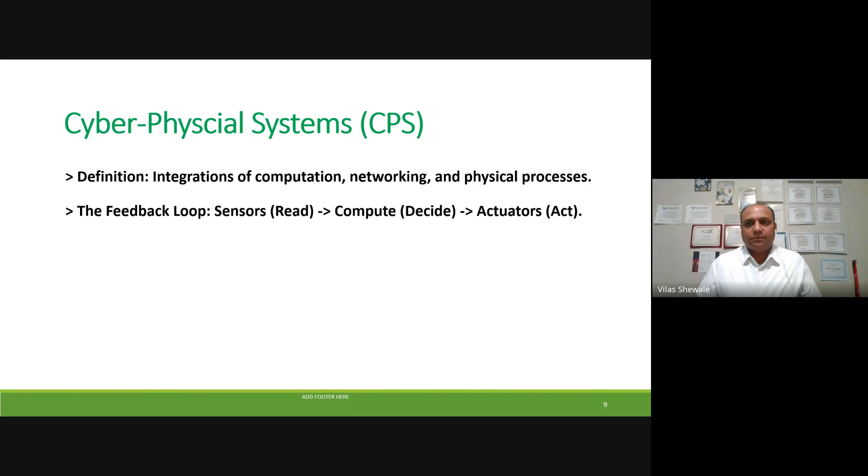In IT, the worst case scenario is usually financial loss or privacy loss. One of the prime examples is the breach of Aadhaar, which I explained last year - one of the biggest breaches for the public sector, where addresses, names, phone numbers, and everything were stolen by hackers.

But in a cyber physical system, the worst case scenario is physical destruction or even loss of life in some cases. Critical concerns.

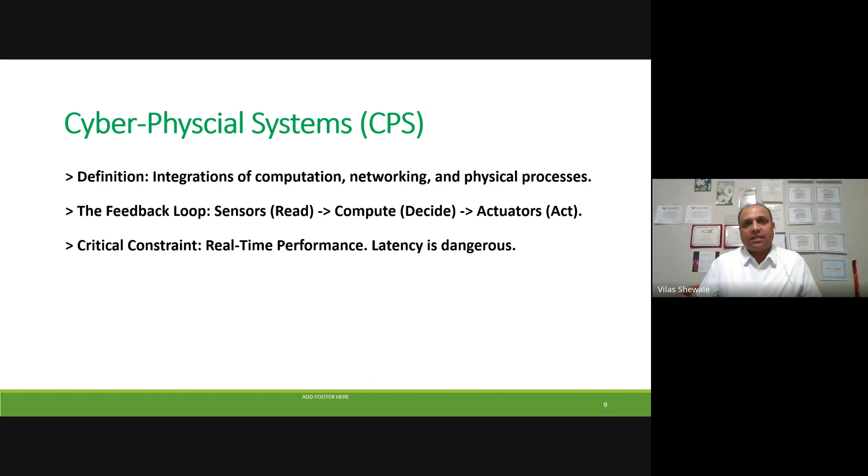If a hacker takes over a Tesla - a car itself is a cyber physical system - and disables the brake, what will happen? Think about this as a kinetic weapon. It can be used as a weapon, meaning you can intentionally cause brake failure in front of someone, or accelerate the Tesla in front of someone, to cause harm.

If a hacker takes over the dam floodgates - imagine this, I have a very interesting video coming in a few slides - that is a weapon of mass destruction, causing havoc in that region to gain financial benefit or some other motive. You don't know if they're using it to terrorize the region - some foreign actors doing this.

So securing the system matters, because the blue screen of death, the famous Microsoft blue screen of death, could mean actual death. It's pretty scary, but it's the reality. There's no movie fiction anymore, it's just the fact.

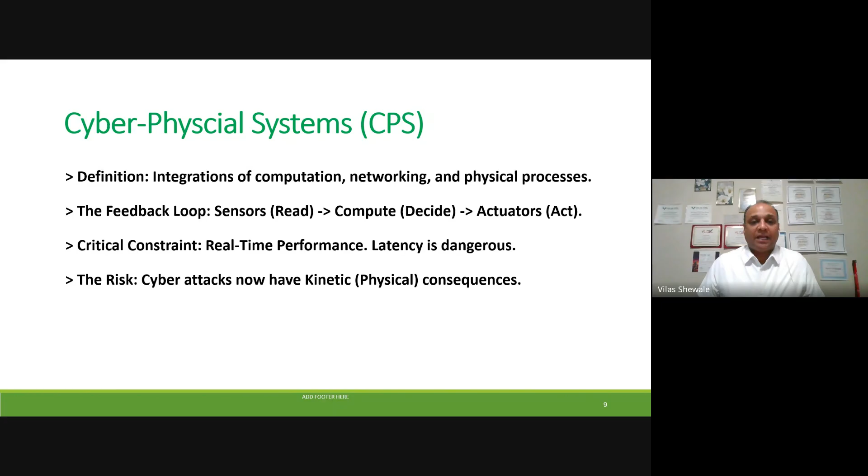So what does the smart grid architecture look like? That's pretty simple in my viewpoint. So visualizing the target - the grid is no longer a tree, meaning roots and branches and everything. It's a web, it's a mesh. The prosumer, you're a node.

Pro-consumer and prosumer - your solar panels inject the power, your EV absorbs the power. This is basically bidirectional flow, which is a nightmare for stability. So it requires constant millisecond level communication, has to be always on, all the time.

The advanced metering infrastructure is the chat network of the grid. If I can hack the advanced metering infrastructure, I can tell 1 million meters to disconnect simultaneously. What is that? Basically the whole city goes dark.

And there is a SCADA system. The SCADA system is not just related to the power grid or anything - we use it in oil and gas, and we call it OT infrastructure, SCADA system. Whatever applies over here applies in my field as well, but I'm just giving you the entire aspect through the renewable energy point of view.

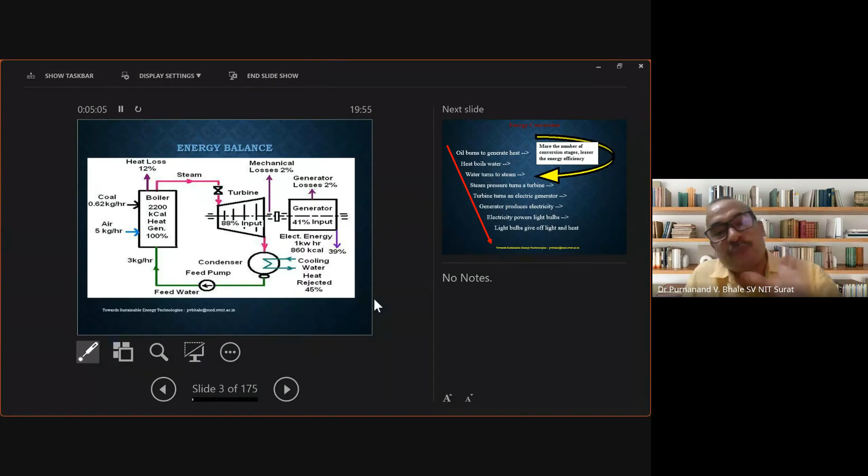So that needs to be revisited. It's nothing like preaching, but I remember when I was a student, our thermodynamics teacher emphasized this, and I'm trying to follow it to the extent possible.

So the more conversion loops involved, the more will be the losses, obviously. We need to see that direct energy conversion systems are equally important. In fact, solar came more as a direct energy conversion system, but later on, unfortunately, it got hooked to the grid. As far as thermodynamics or energy conservation is concerned, thermodynamics can be said to be a prelude to energy conservation.

So we all know about the first law of thermodynamics: energy can neither be created nor destroyed, right? But it can be wasted. We need to save energy. That's important, and that is what the emphasis of the Bureau of Energy Efficiency is also.

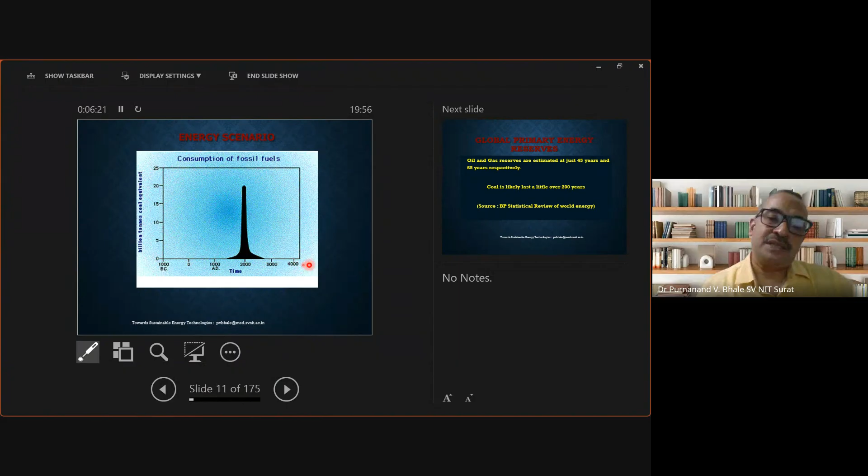As far as fossil fuels are concerned, we are on the verge here. We came across the tremendous possibility of changing our lifestyle through fossil fuels, but most of it we have consumed. There are many different agencies that talk about the availability of resources. Their estimates are slightly different, but within 10% they are correct. People are saying that oil and gas reserves are for 45 to 65 years, and coal is likely to last for 235 years.

In that context, although we are an independent country, are we energy independent? A lot of research is happening, a lot of installation of solar is also happening, but to what extent is it sustainable? Even the government is doing a lot of good things, but in that context, we need to see how we can develop sustainable technologies.

So if you consider the amount of energy we receive every day from the sun, it is tremendous compared 1:1 with such energy requirements. It is said that if we can tap just 5% of solar energy, it will be 50 times more than the world's demand. 5% tapping of energy means you need 5% of the surface area covered with solar systems. It's a huge target.

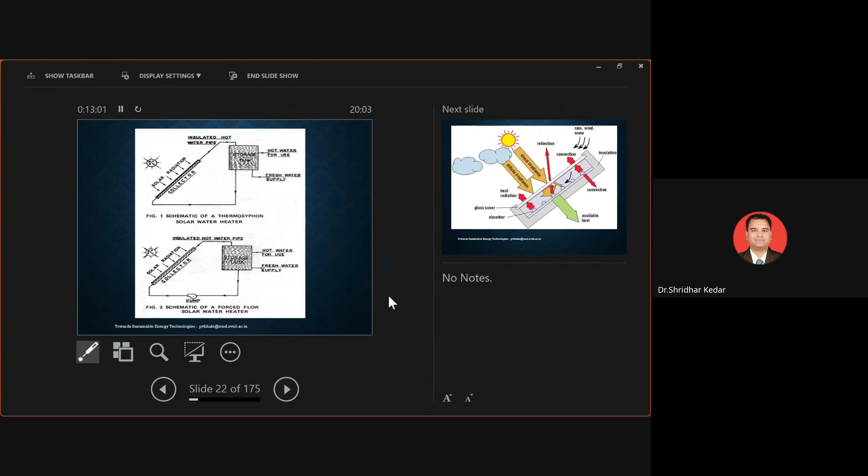Another problem is the tubing - salt deposition inside the tubing. And if you want to, can you find out the difference between these two figures? Any difference? At the bottom. One is natural circulation, and another one is forced flow.

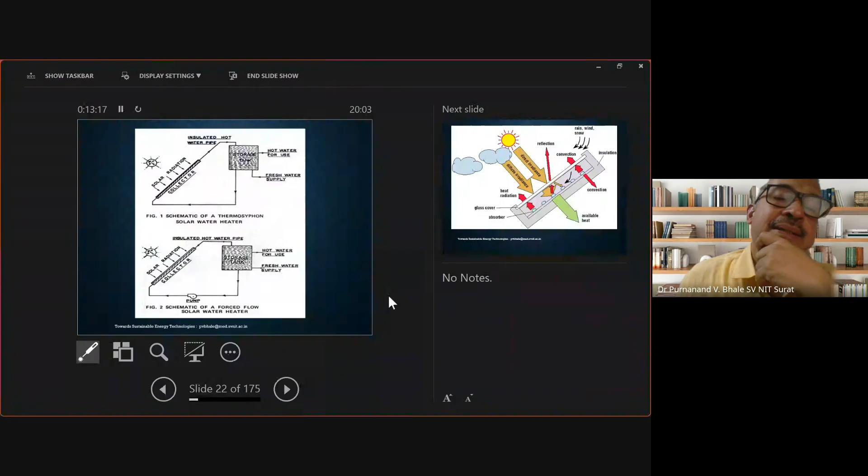Yes, correct, correct. So industry may have the requirement when it is a large size requirement, maybe some 1 lakh liters per day, and industry may need to use the pump. Otherwise, for domestic applications, residential applications, resorts or hotels, during the daytime it can store, and during morning or late evening you can extract. So one is having natural circulation, another is having a pump.

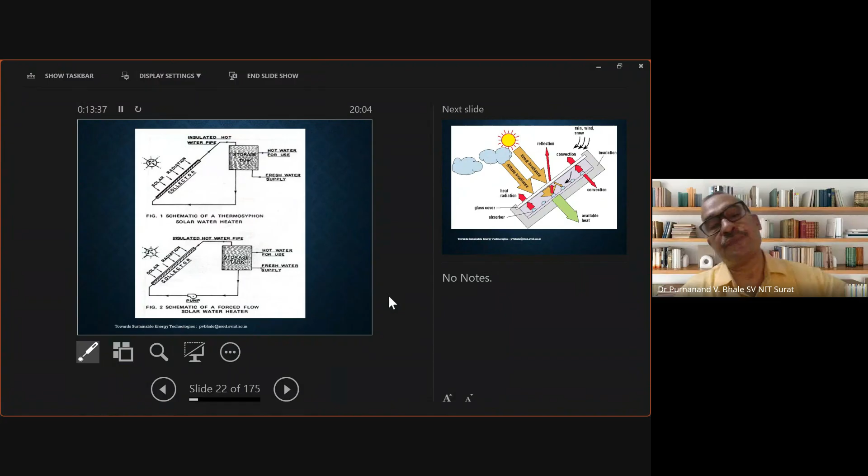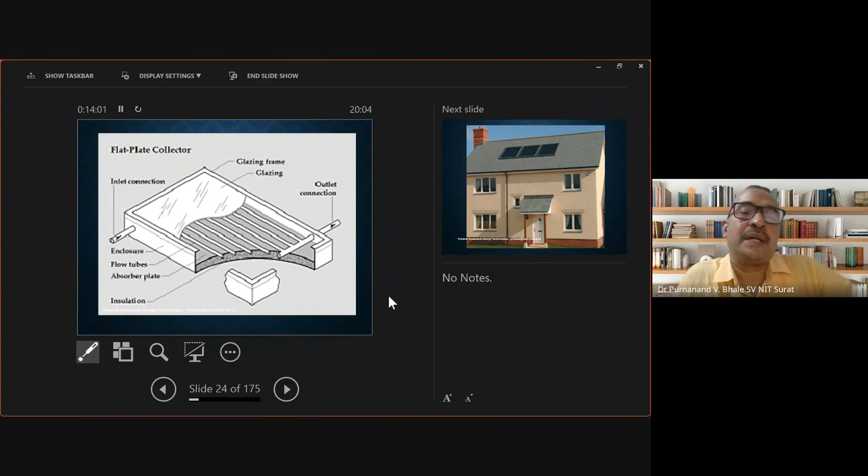Normally, everyone knows about the losses which take place, how solar energy gets trapped and how it gets converted for useful heat - there are losses. Earlier this used to be the system, now it has totally changed. Even in the tubings, because if a single glass breaks, the cost is high. Similarly, the deposit of dust is also challenging. If you have this type of surface, the dust deposit is minimal. We have some articles on the effect of dust deposition also.

Similarly, this is again some solar thermal system, a solar cooker, which is used for cooking. But the challenge is how we can make it more popular - it's still not so popular. Can you mention some of the reasons why it's not so popular?

Sir, a solar tracking system is not available. Okay, it's a flat plate. And again, the total energy which we are getting from that is not concentrated. We are lagging in getting the energy. Moreover...

Due to the hard water use problem, in case of ETC tubes, there is scaling and corrosion problem inside the evacuated tube collector - small water droplets, white deposits. But as far as solar cooker is concerned, what are the limitations of the solar cooker? Why is it not getting popular?

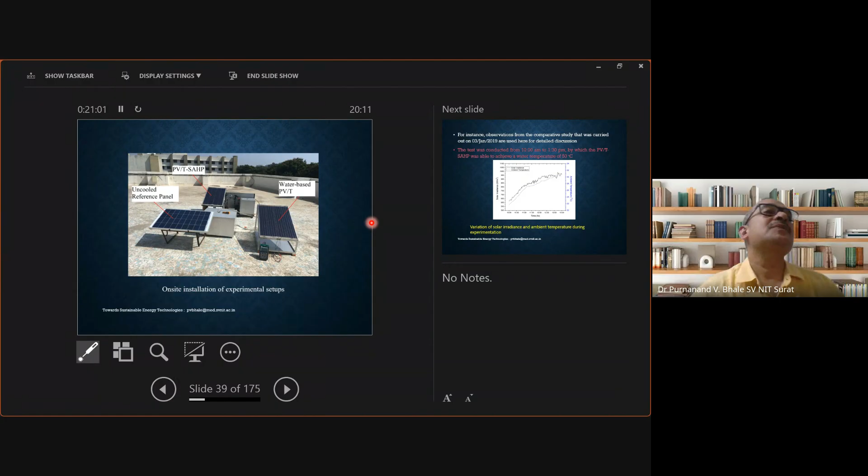So in terms of thermal management, we explored certain possibilities and developed certain systems. For solar radiation, we have a weather station and are continuously monitoring. You can see the PV temperature can go up to 65, 70, 75, and sometimes even 80 during summer. But if you can maintain it with certain ways, it's possible to maintain the PV efficiency, which will also increase.

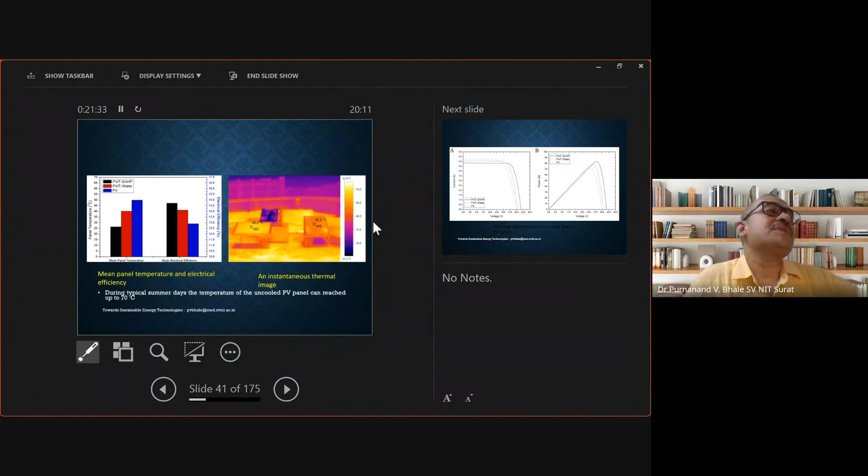We developed certain PVT systems with one industry involved in hot water solutions for hotels and resorts. We had an MOU, and now at many places this is at TRL level 8 to 9, because at certain hotels and resorts this has been under installation with different capacities. You can see that if you need an electric geyser to heat a certain quantity, the system we developed is PVT based, coupled with the heat pump system, which can achieve reduction. It is air source as well as water source systems, showing tremendous reduction as far as hot water is concerned.

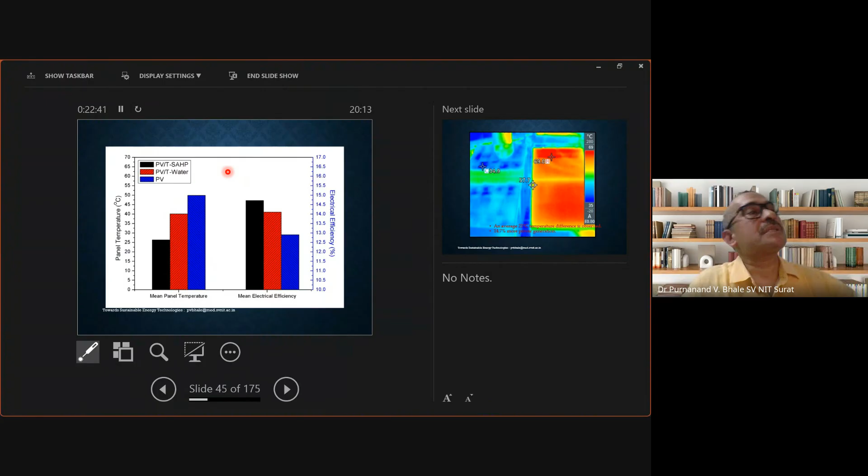Hot water industry is a huge industry as far as the requirement is concerned for various applications, not just for bathing purposes. You can see significant improvement in efficiency, and it's not just efficiency improvement, but getting hot water also. The PV has a very high temperature, but if you can maintain it, it's possible to have higher power generation also. Similarly, if you have independent PV and thermal systems, the space requirement is very high. On the other hand, if you have this technology, the space requirement is very, very less on the terrace.

My point is, why is solar thermal power not happening today? This is my question. Efficiency here can be higher. You convert solar energy into steam, and you can make steam rise just like a power plant. Why has PV progressed to such an extent that almost nowhere will you find solar thermal or concentrating systems being used for power generation, though it is used for process heating? Can anyone tell the basic reason why electrical energy generation is not happening with the solar thermal concentrating system? I want to know.

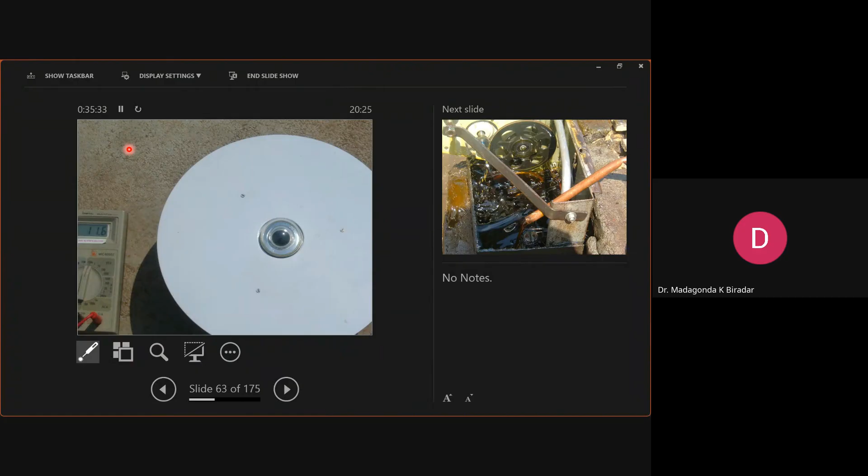And all type of jugaad we made in those days. This is a pump you need, otherwise a very costly pump to circulate the hot fluid.

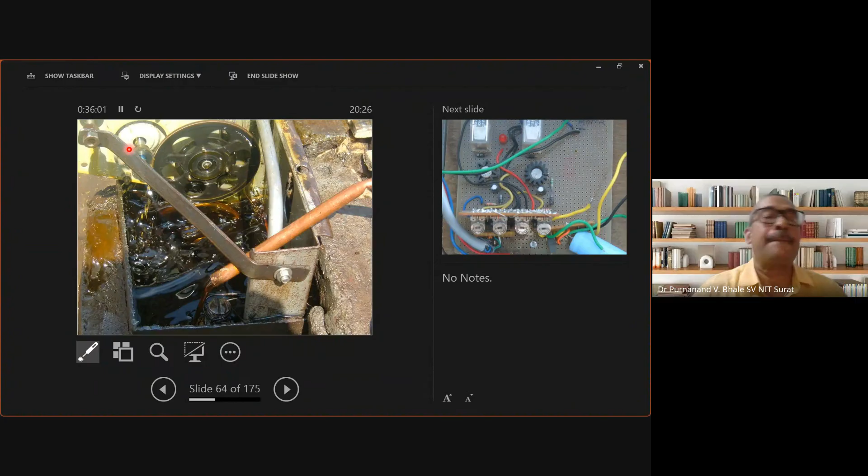So this tracking circuit, and you can see here, can you see that it has not come properly? This is a wiper motor of an auto rickshaw, which we also used in this system in this way.

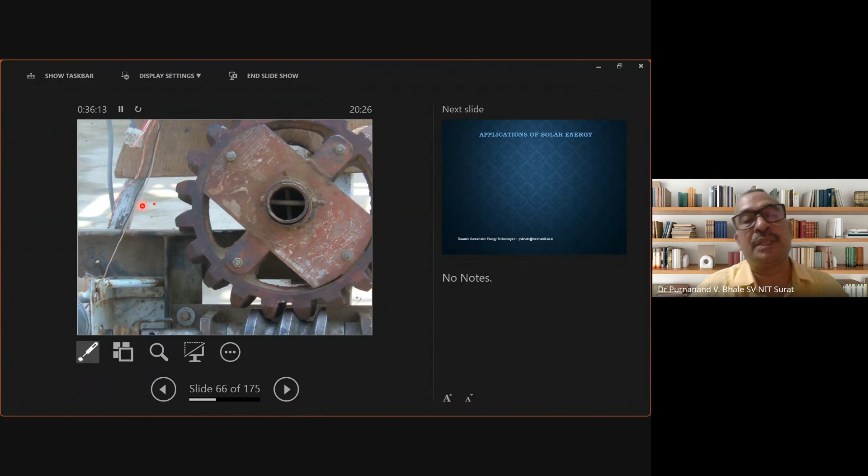So this is how the energy harnessing conversion, the workshop people worked on it. So this photograph may be from around 25 years back when we worked on these systems.

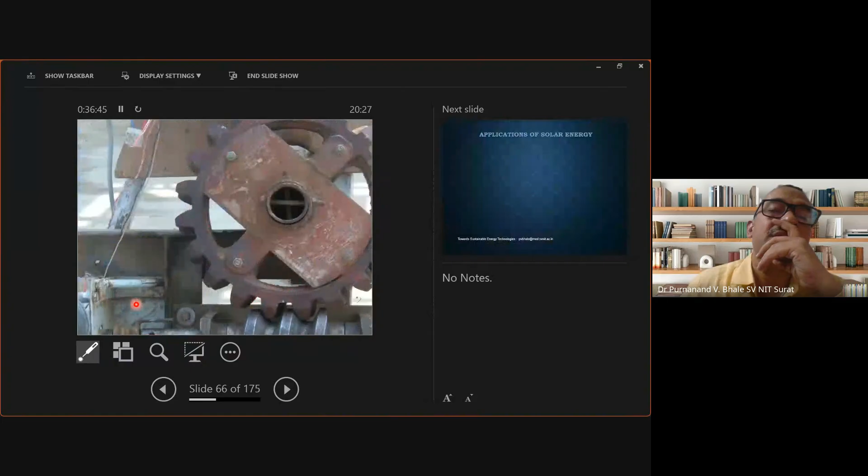But the beauty is this is a moving focus system which was developed, such that as the sun tracks, the system also tracks, and so the receiver or the absorber will also track. Now, if the absorber keeps on tracking, you cannot cook the food. If it is to be used for cooking applications, you need a fixed focus system like this.

What is the name of this system? Scheffler. You must have heard this name. So the focus will be fixed. This will adjust itself in such a way that it will all the time maintain the focus constant.

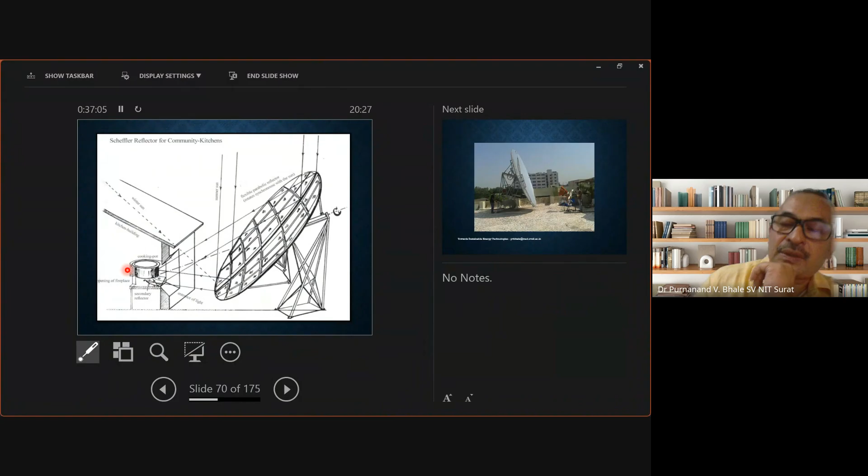So we installed a similar system on our terrace, a 16 square meter Scheffler system installed on our terrace, and this is a receiver, and we did many research works on the system.

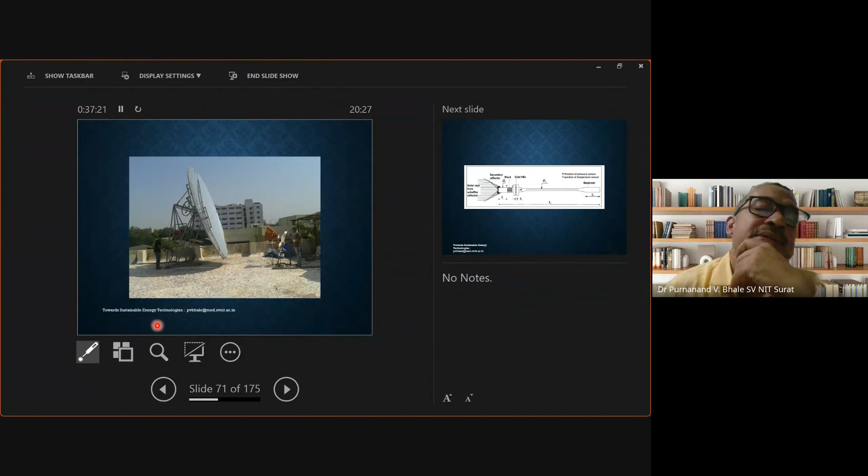Including even in the cryogenics track. One of our colleagues, Professor H.B. Nayak, was closely linked with IIT Bombay for this cryogenics purpose.

So this is some stack you can see which is used. In that case, we wanted to have cooling by heating, that is cooling up to cryogenics application. So this stack used to heat, so we deployed a solar system to heat it.

So it sounds good that on the terrace we have a temperature like 500 degrees centigrade. Here on the ground floor we have a temperature around minus 200 degrees centigrade as far as the application is concerned, the cryogenics application.

This is a cryocooler basically. You can see the steep rise in temperature in just a few seconds, up to 700-800 degrees centigrade.

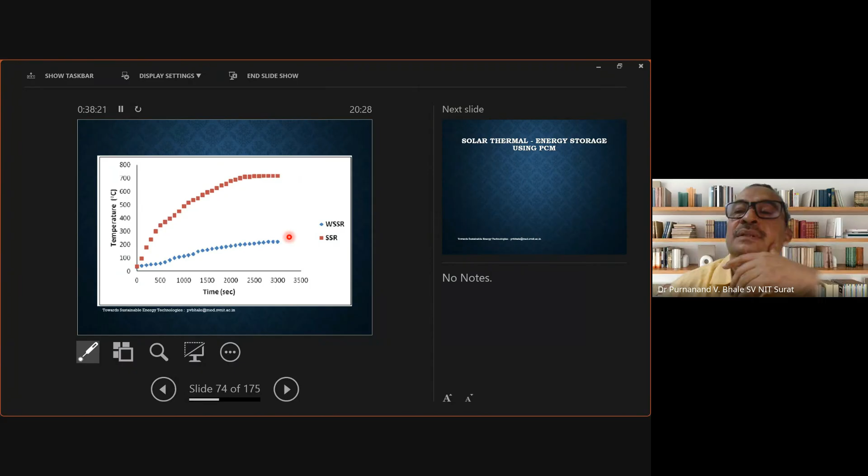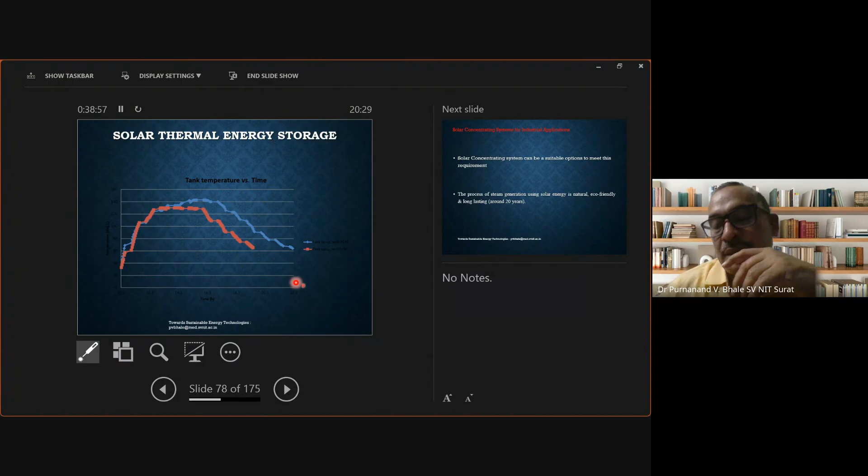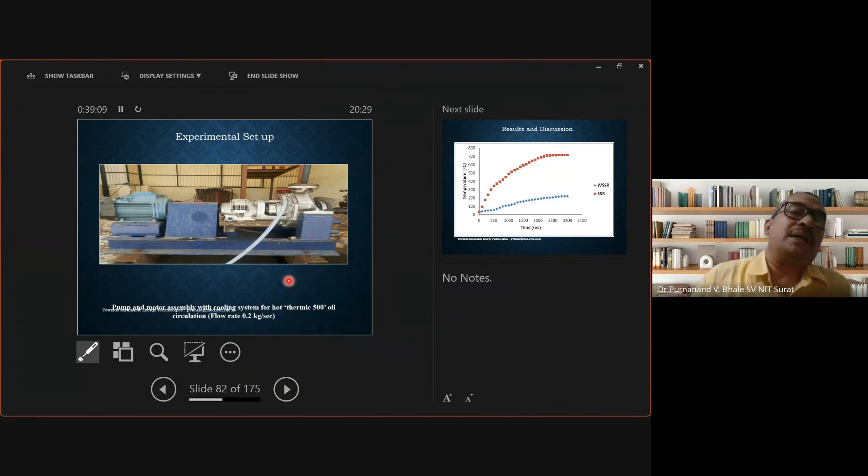So we also deployed the storage systems. You need to have a special pump because thermic fluid pumping is not done by an ordinary pump. You need some cooling arrangement for this pump also. So this is all about the performance which we got.

So this is just sharing some of our experiences as far as solar PV, solar PVT, solar thermal, or even the concentrating system is concerned. Similarly, there are certain technologies I would like to mention about biomass and bioenergy based technologies.

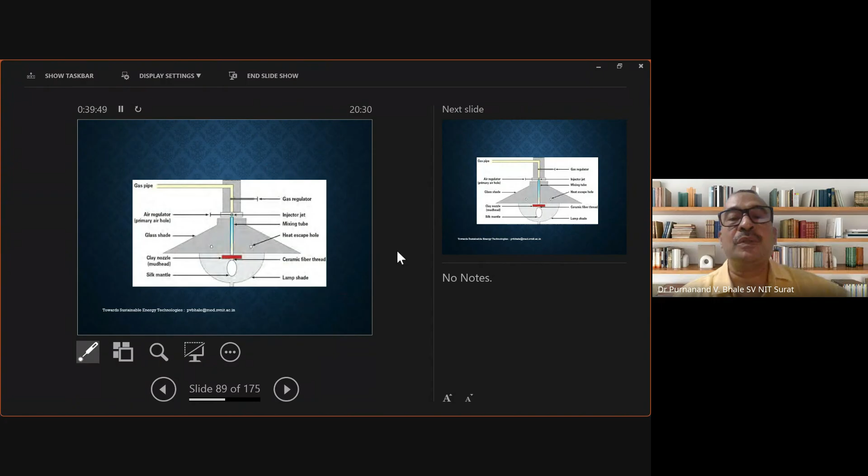We know about biogas, which used to be called gobar gas in villages, with the basic principle of anaerobic digestion when we feed some slurry or cow dung, the gas gets generated. This gas can be used for cooking applications, and it can also be used for lighting. At many places, gas generation took place.

Our friend Ajay Chandak also developed a biogas plant, a good example with some rational thinking, where kitchen waste, as well as cow dung, as well as human waste, also got mixed to generate biogas meeting the requirement. So biogas can be explored in many ways.

There's a lot of interesting comparison between biodiesel and biogas. We'll not discuss that right now, but biogas is certainly rewarding, and you must be aware about the SATAT scheme by the government, where oil marketing companies like Indian Oil, Bharat Petroleum, are using the cascade of bio-CNG. We have developed one plant.

Our colleague Professor S.H. Chennaiwala is a Bhatnagar fellow, and at the same time we are involved in making the DPR, the economic viability report, for large size plants. Large size means 12,000 meter cube or 5-ton CBG plants. We are involved as far as consultation is concerned.

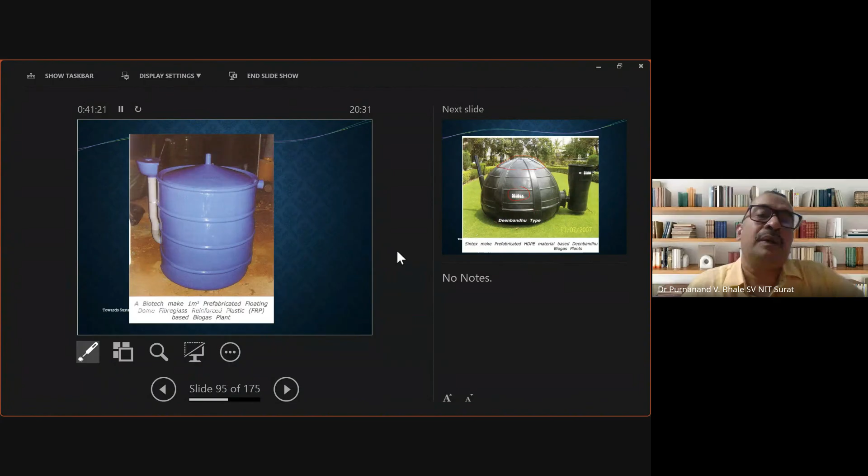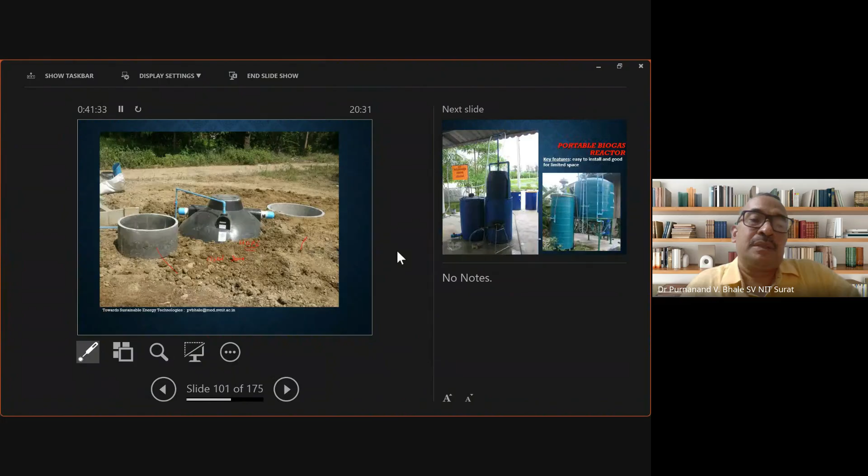As I mentioned, we undertake consultancy across the country in various areas pertaining to energy. This is a different type of biogas plant, like an HDPE biogas plant, or it can be an FRP based biogas plant, of different makes. This one is at IIT Delhi, and this is at BRC. You can have a fixed dome type biogas plant which can generate the gas.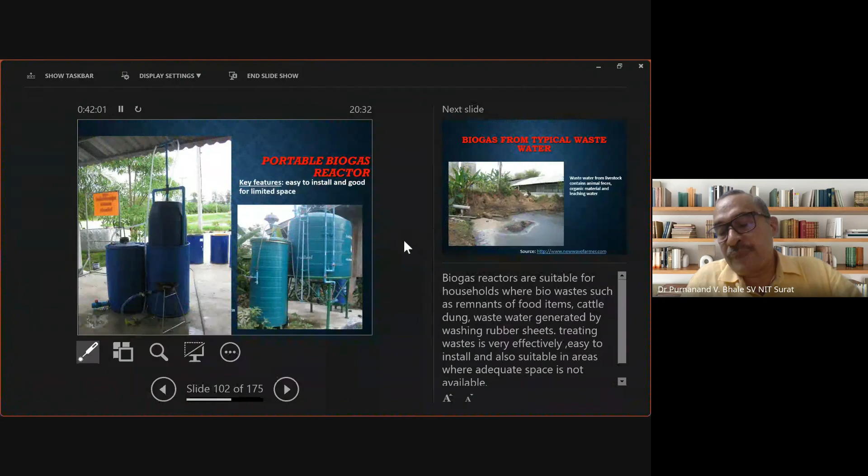There is anaerobic activity involved, though you need not have a sophisticated setup. Decomposition of cow dung or any organic matter is a natural process that bacteria carry out. You can help them, or you can harness it using some containers. Even rich manure can be used this way. So it need not be a very sophisticated system. Even if you can cover a nala in this way, you can get gas generated, and it can be used for a variety of applications, including cooking.

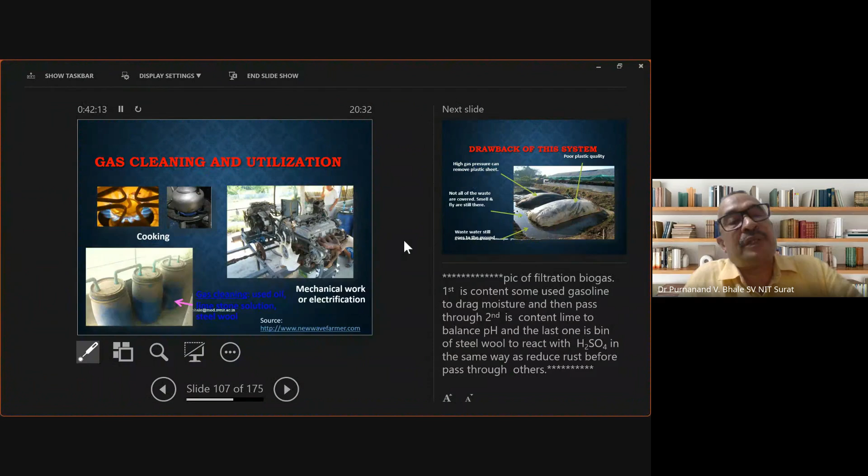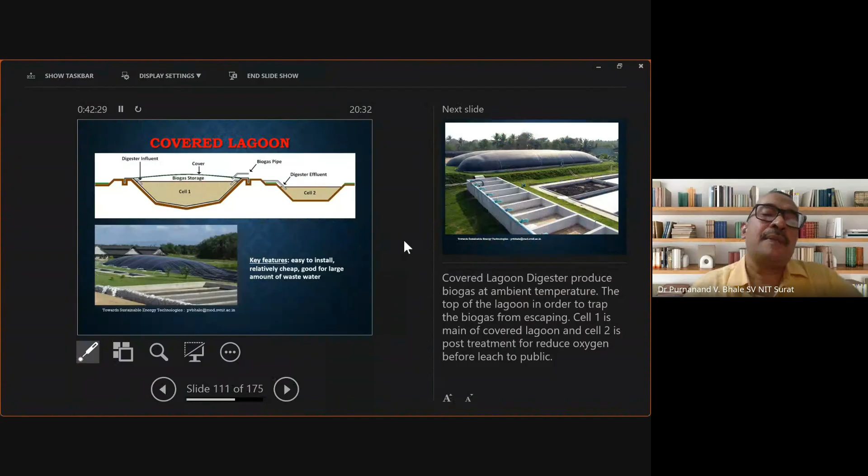Depending on how much sophistication you need, you can go for a particular type of technology. It can be a medium to large size system with a covered lagoon. Basically it is a process of hydrolysis, acidogenesis, acetogenesis, and methanogenesis.

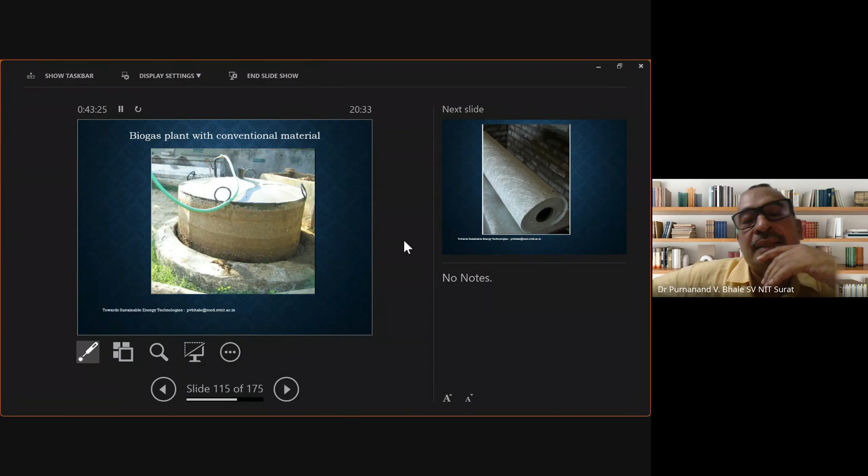Recently—well, not recently, I can say around 2013-14—one NGO, Gujarat Energy, came to us. They had the problem that in conventional biogas plants like this, which involve cement and a metallic dome, there is presence of H2S gas causing corrosion. They used to get funds from the Tribal Development Fund, where in places like Vyara or Bardoli in South Gujarat, animal husbandry is good, so people have cattle. So one way to increase their income is to have a biogas plant, and the government used to give a subsidy of maybe 90%, with the beneficiary giving 10%.

So this NGO used to work in the field, and they were always given some target, let's say establishment of 200 biogas plants. But the problem was, though this NGO was doing well, one beneficiary might be in one part of a village, and another maybe some 10 kilometers away in a different village.

When it comes to digging, we normally used to ask the user to take care of the digging part, but cement, mortar, bricks, and the dome, and their transportation used to delay the target. Many times by March the target wasn't complete, and there used to be penalties, and problems releasing payments. So they requested us, can we go for some pre-mold type of thing like an FRP type biogas digester, so that the time will be less, and bricks, mortar, transportation, all such issues can get resolved.

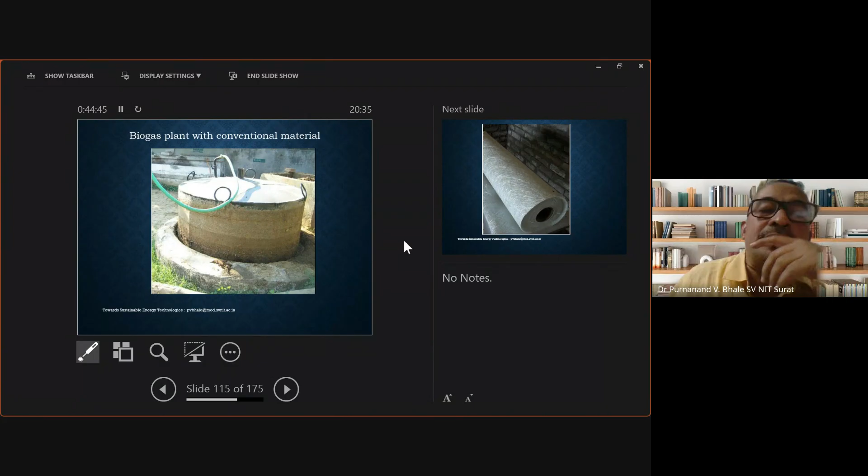It was just like a sheet which can be turned to form this shape, so it was much easier to have some riveting at the site and transport this type of dome, because they can be easily transferred rather than the bricks, mortar, or the fixed domes, which are called metallic domes.

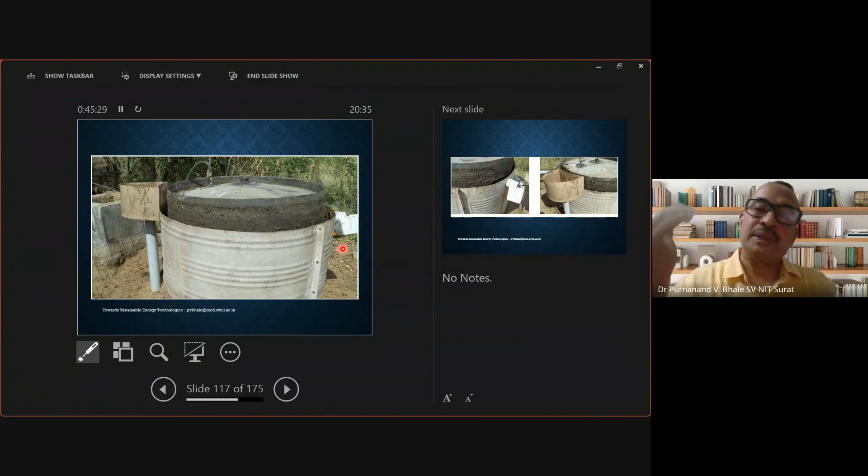Just like you can fit 10 glasses inside one glass, that's how we used to transport them. We tested this against the conventional one, with the same fitting and all, and we could see that the temperature used to be higher because FRP is a bad conductor of heat and it used to store the heat. In terms of temperature, it was much higher than the cement one, and displacement also we observed much higher. So in terms of gas generation, we also tested the strength of the FRP.

All of them are well placed now. It was challenging to have student involvement, particularly with the waste food—someone's leftover food that we have to process—it's all about making the hands dirty.

But we kept them motivated, and then we realized these systems will not work unless we have some semi-automation. We also found a lot of problems, and there are some failure stories too, from when we were involved earlier. But with all those good or bad experiences, we moved ahead, and we could also add the gas generation.

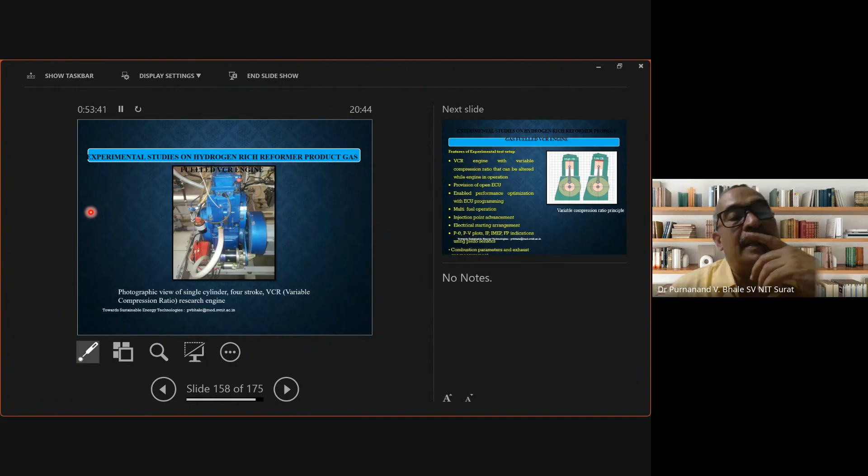So the task given was to find out why this plant is not performing, and what are the reasons.

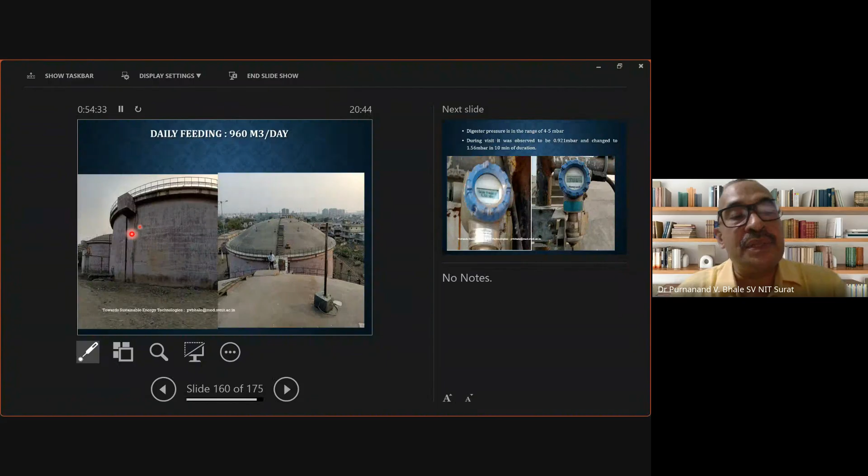Ideally, how much it can perform, how much gas is getting generated, what are the losses, and what care can be taken up to improve the yield of the system.

So there is a blower house, and this soda treatment is consuming a huge amount of caustic for scrubbing, and you can see the H2S as well as a complete SCADA control system which takes care of it.

There are many breakdown issues because of H2S. A 1 megawatt DG set is coupled into this, and here you can see the 1 megawatt DG set with all SCADA control system.

So 1 megawatt DG set, when it comes to production, was not generating as expected. It will generate 1000 kilowatts per hour, meaning 1000 units in 1 hour. Even with 16 hours of continuous production, ideally, on full load condition, 16,000 units should be generated, which were not getting generated.

So the task was to find out why it was not getting generated. This took almost 1 year, and it was the peak COVID time.

We did one year of testing of samples - input slurry, output slurry, volatile matter degradation - to understand why degradation was not happening. The obvious reason was it got constructed a few years back when the population was not that much, so accordingly your flow and retention time are linked.

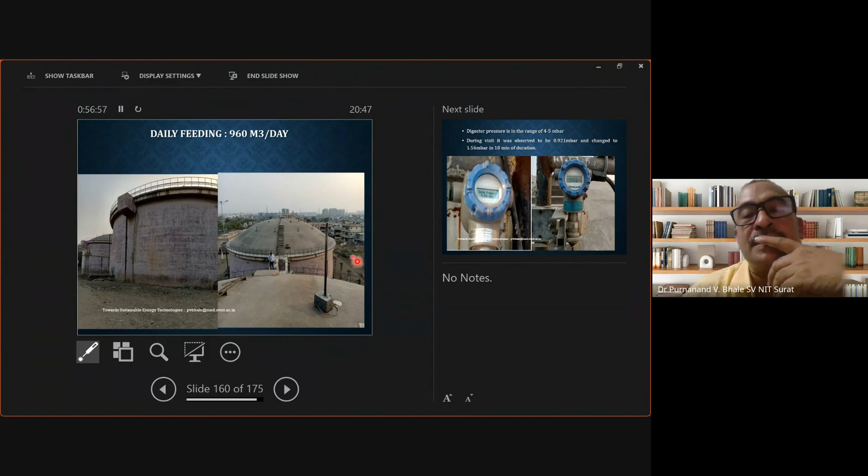There was a challenge in where to get samples for analysis or take measurements, because the system is charged all the time - sewage is coming, you cannot stop it. You cannot make any drill into this line for taking a sample or doing treatment, because the gas is flowing.

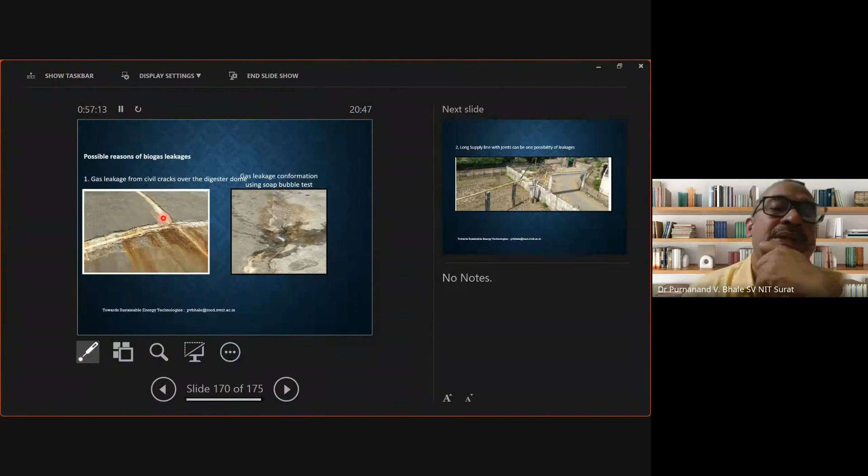So a lot of care was needed, and we successfully handled this consultancy project and identified the reasons - total leakage, the possibility of maximum power production, and certain SOPs and guidelines to make it more efficient, based on scientific evidence of how much degradation is possible, the retention time, and how the slurry comes out without complete digestion. It took almost 1 year to handle this project.

So reduction in volatile solids was not adequate, and the gas generation losses were around 2000 cubic meters - a small 2 cubic meter system is enough to cook food for 4 people, so losses were around 2000 cubic meters. But later on, many corrective actions and measures were taken.

So this is all about a gist of the different projects which we handle. As the time is reaching out, I need to stop somewhere.

By the way, this is our 10,000 square feet built-up renewable and sustainable energy lab. We have several sponsored research projects ongoing, and several consultancy projects.